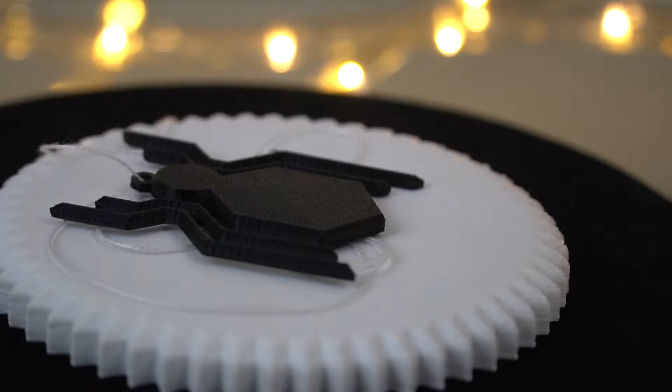Hey everybody, I'm Keon from Print3D, and today we're going to be making a product for everyone's favorite web slinger, Spider-Man. We're making an adorable Spider-Man necklace in honor of Marvel Infinity War. So without any further ado, let's get started.

The first thing we did was open Fusion 360 and got to work. To get started, we need to make sure we have a good reference photo. Luckily, we found a great reference photo of the logo on Spider-Man's chest. We'll use that for the logo in this project.

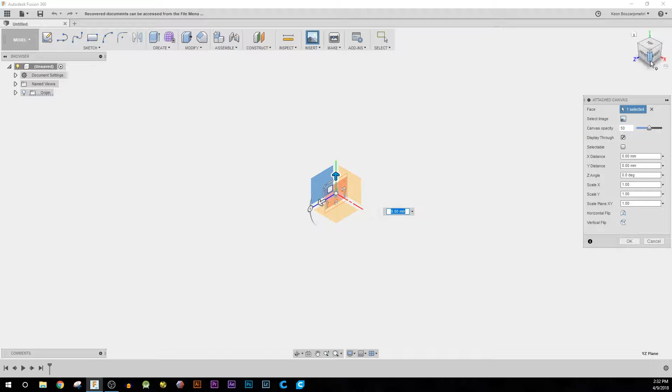Just like last week, we need to make sure that our reference photo is right on the origin, because we're going to be using polygons and shapes to create our 3D model of the logo. Now that everything's lined up, let's start drawing out the logo.

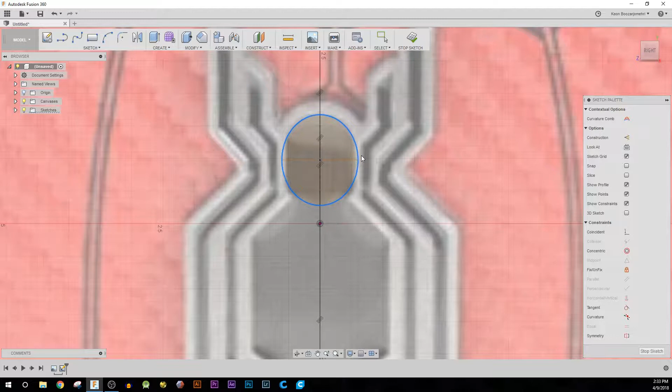What we're going to do is trace one side of the logo and then mirror it on that center axis line that we drew. The first shape we drew was an ellipse, kind of like an elongated circle. From there we moved on to the body and just traced around the general shape of the abdomen.

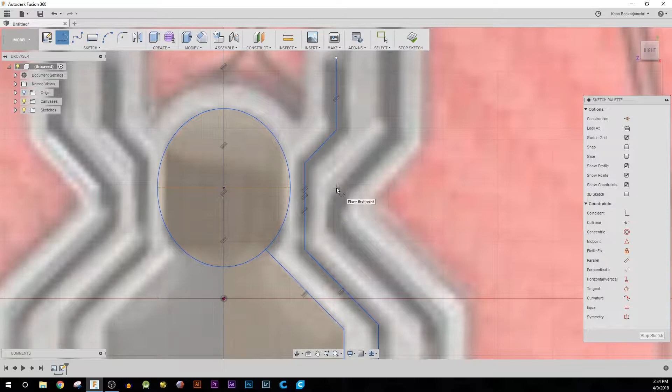Now that we have the general body shape, we can move on to the legs. The legs have a really rigid, robotic look, so to make sure the inside and outside of the leg designs look exactly the same, we're going to draw a line on the center of each leg, and then use the offset tool.

We used the offset tool last week, but the main use of it this week is to make sure each of the legs looks exactly the same on both sides. So what we're going to do is take that center line, use the offset tool, and go left and right of that center line. That'll create a perfect design for each leg.

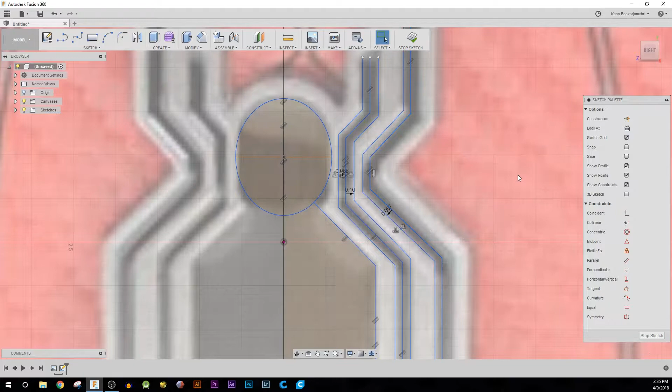Now that we've drawn each leg, let's make sure to finish it off. We just need to take the line tool and trace out the top and the bottom of each leg. After that, we'll be good to go.

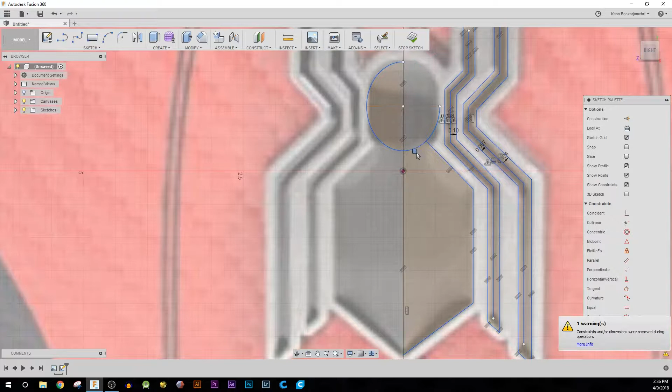That right side is looking really good. Now the only thing left to do is use the mirror tool. The mirror tool just makes it so that everything highlighted gets mirrored along an axis.

As soon as we selected this photo as our canvas, we made sure to draw that line in the exact middle so we can mirror everything to the right onto the left side of the drawing. And bing bang boom, we got a pretty good logo going.

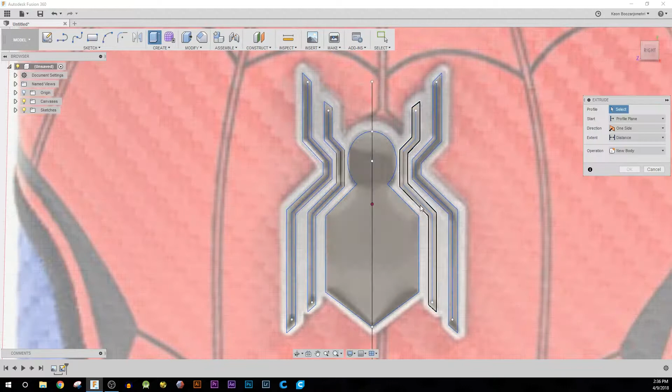Now we just need to extrude it, but to make it look better, we're going to do something a little different. We're going to extrude it a little bit more and use the angular extrusion. The angular extrusion is kind of like a chamfer, meaning it'll turn any harsh edges into a slant. By doing that, it makes the logo look a little bit more put together and a little bit more futuristic.

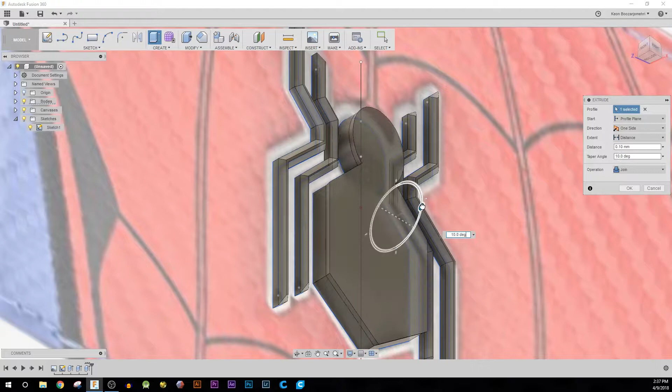After we've done that for all the top edges, this logo's looking great. Let's just add a little ring to the top so people can hang it from wherever they want.

Wow, this logo's looking incredible. But if you look closely, there's definitely something missing. Each of the legs and the body aren't connected.

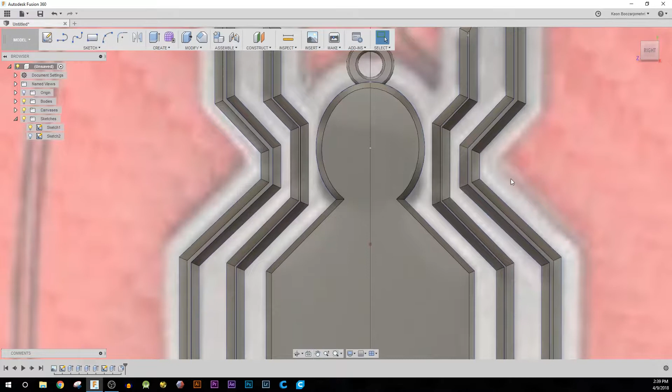That's a big problem when you're 3D printing, because if you printed it right now, each of those 5 parts, the 4 legs and the body, would be completely separated, and when you pull it off the build plate, they wouldn't be connected at all. What we need to do is make a little thin connection that'll draw them all together.

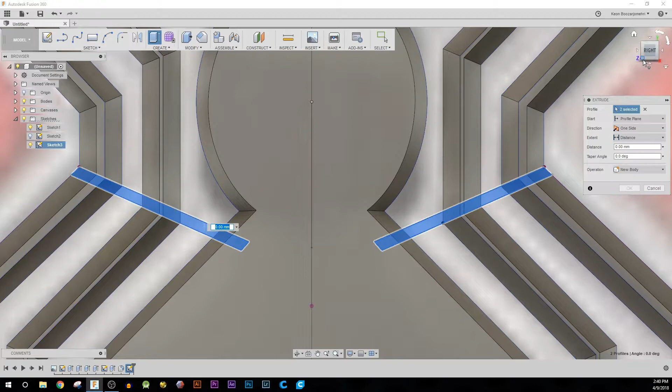To make sure that the support piece doesn't get in the way, we're going to make it a thin layer at the very bottom, so if you're looking at the model at an angle, you can't really see it.

And there you go, our Spider-Man necklace is ready for the printer. Now let's send it over to Cura and see what it looks like.

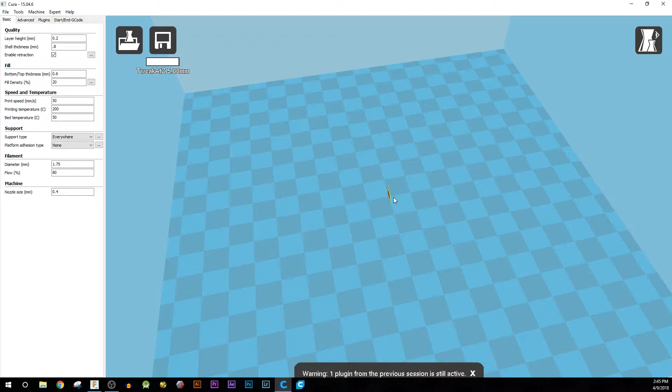Now that we're in Cura, let's load in the file. Whoops, that's way too small. Guess we didn't measure too well when we were modeling, but that's no problem.

In Cura, you can use the scale tool to scale your model up or down, or make it bigger or smaller. This is really useful if you want to change the size of your model but don't want to go back into your 3D modeling software.

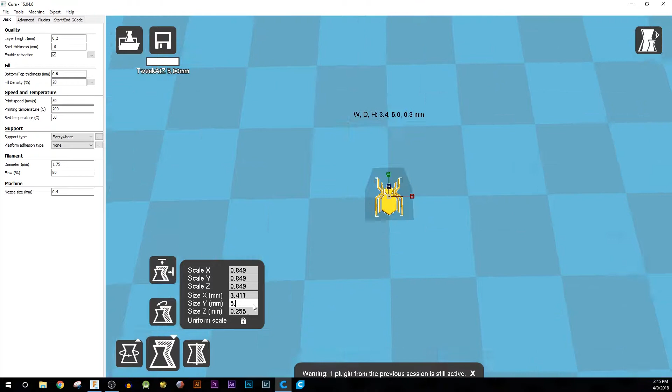What we're going to do is measure out how big we want the necklace to be. I'd say 3 inches should do it. After converting that, we see that that's 76.2 millimeters.

Now that we've scaled it up to the size that we want, we can take a look at the overall model. Honestly, I think it looks a little tall. We can change that by going into the scale tool and changing only one of the 3 dimensions.

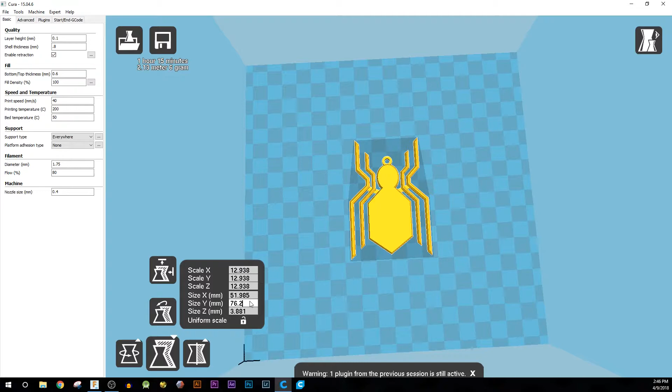Instead of doing X, Y, and Z, we can do X, Y, or Z by taking that lock icon and turning it off. By doing that, we can now influence the Y-axis without changing the X and the Z-axis, or in other words, we can make it look more cartoony and short.

Now that looks much better. I think it's ready for the printer. So let's take a look at it while it's printing.

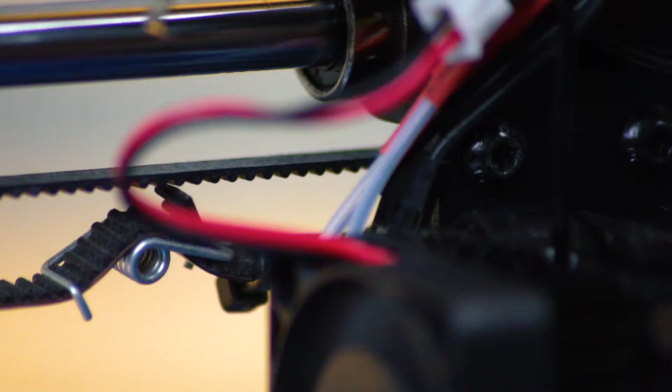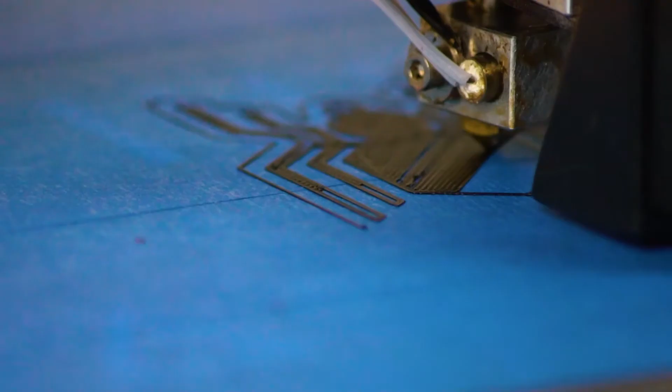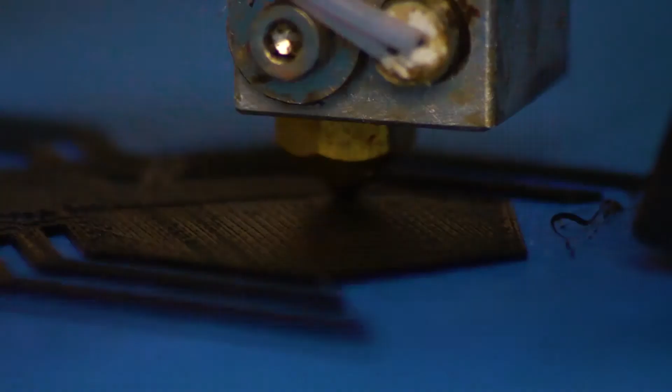Is he strong? Listen, buddy, he's got radioactive blood. Can he swing from a thread? Take a look overhead. Hey there goes the Spider-Man. In the chill of night, at the scene of a crime, like a streak of light, he arrives just in time. Spider-Man, Spider-Man, friendly neighborhood Spider-Man. Wealth and fame he's ignored, action is his reward. Look out, here comes the Spider-Man.

Whoa guys, do you feel that? I think it's our Spidey sense, and it's telling me that this is a great product. I'm really excited how it turned out.